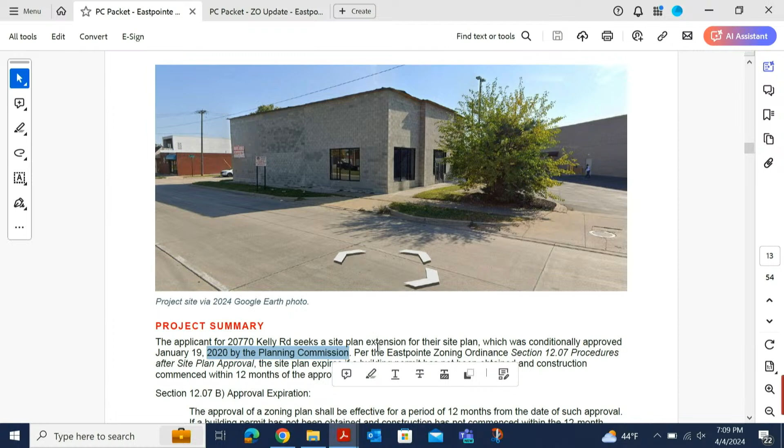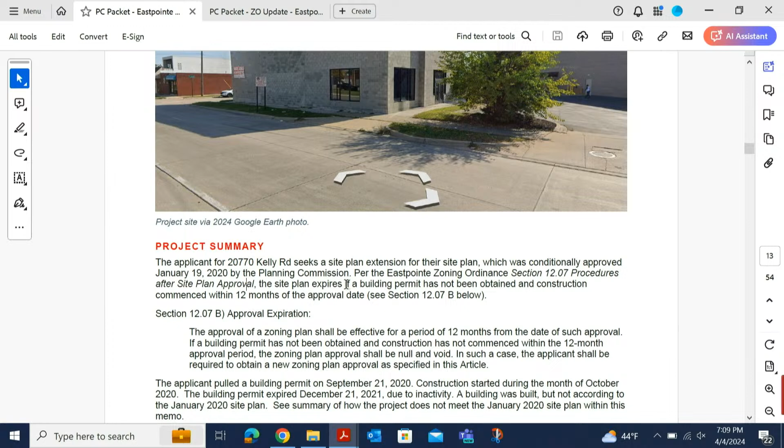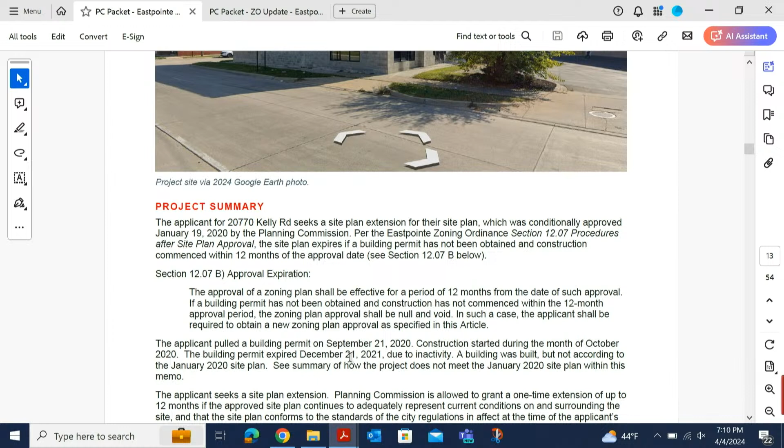Per the Eastpointe zoning ordinance section 12.07, procedures after site plan approval, the site plan expires if a building permit has not been obtained and construction commenced within 12 months of the approval date. This is the technical language cut and paste from the zoning ordinance. The applicant pulled a building permit in September 2020. So their site plan was approved January 2020. They pulled a building permit September 2020. Construction started during the month of October. The building permit expired in December 2021 due to inactivity, and a building was built, but not according to the site plan that was shown to Planning Commission in January 2020.

And the summary of how that site plan or the project does not meet the January 2022 or 2020 site plan is within this memo, and I can just go over that in a second.

So the applicant today seeks a site plan extension, and Planning Commission is allowed to grant a one-time extension of up to 12 months if the approved site plan continues to adequately represent conditions on and surrounding the site, and if the site plan conforms to the standards of city regulations in effect at the time of the applicant's request for an extension. So this is copied and pasted from the language of the zoning ordinance.

As we know, the applicant submitted a request for extension in February 2024. The January 2020 site plan is no longer in compliance with the 2023 zoning ordinance update. I can show you a summary of how the project does not meet the 2023 zoning ordinance, if you wish as well. Both are presented within the memo.

So before we go into your recommendation, I'd like to ask, so this site plan was done for a completely different individual? When did you buy this building, sir? I just purchased the building, I believe we closed at the end of the year. My apologies, I believe we closed at the end of 2023, the fourth quarter of 2023 of last year, and this is the previous owner's site plan.

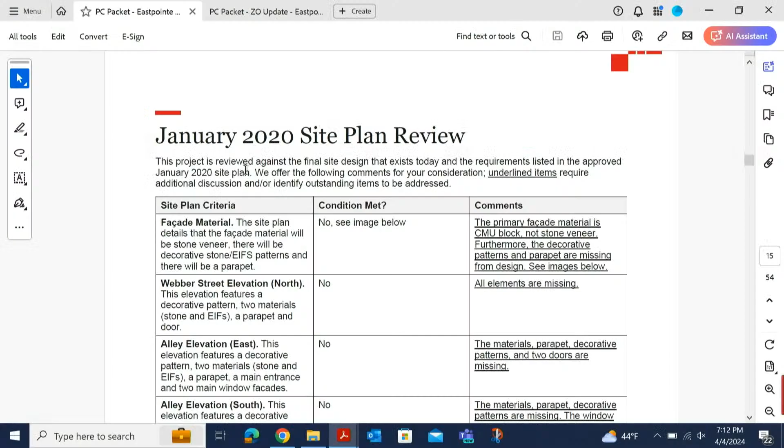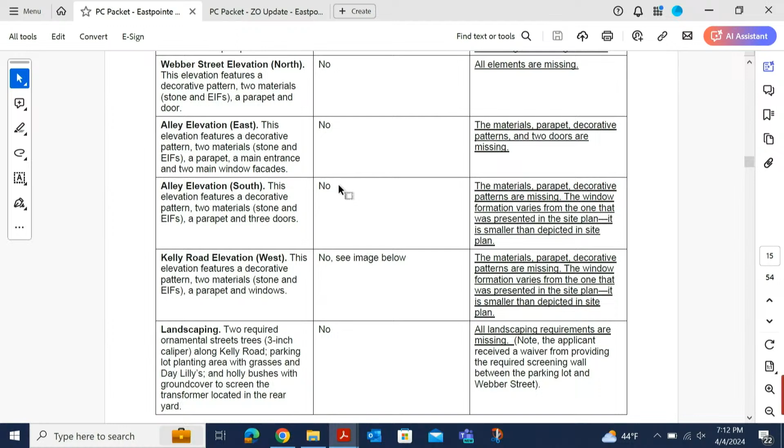All right, I'm sorry to interrupt, Ms. Brochowski, go ahead. Okay, well I'm just showing you, I can get into the recommendation if you wish, but this is the site plan review and how it does not meet the site plan. This is the review of how the project today does not meet the requirements from the 2020 site plan, and I have a summary of it, but you can just see this picture here.

So the facade material is different, there's no parapet on the roof, the windows are a little different. This is just one facade.

All right, so that's not an accurate image because currently there's scaffolding behind the building. Well, on that side, correct, there is. It looks like there is some sort of material. There is, correct.

I don't know, unfortunately, there's not the front, but if you look at the front of the building, because we had a mix-up when they hired the guy, usually in all my building situations the builder pulls the permit, starts the work, sends me the bill, and gets working. But on his, which I look back, because he told me that he put on the paperwork not pulling the building permit, but of course I kind of overlooked that, so that's on me. So we started it, and the front of the building does not look the way it looks now. We actually put a nice frontage on there, it looks good, and then the city stopped us from doing the work, so we haven't done anything else since then.

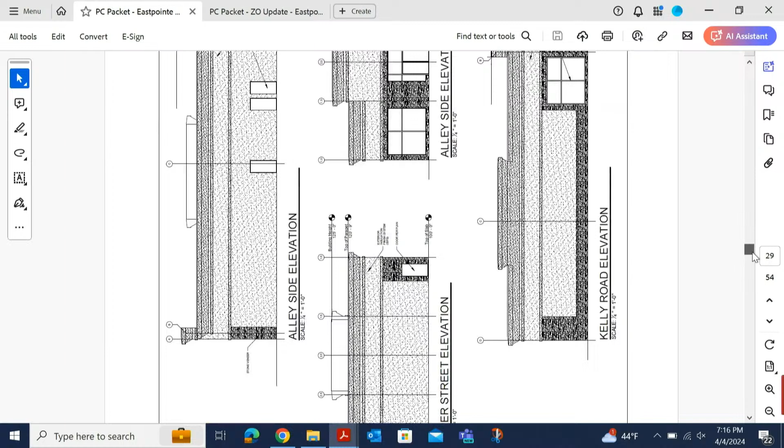If we look at the site plan, if you guys want to take a tour, we can see some instances of implementation—like the alley side elevation drawing is similar in concept—but the facade materials are different and the roof is different.

So would it be safe to say he had an approved site plan and then went and did whatever he wanted?

I think, wasn't the whole thing suspended because didn't he try and go for a marijuana license? Chair, I don't have this information. I can only talk about the facts that I have today.

I was under the impression that building was up for consideration for a medical marijuana dispensary. Mr. Albright, was that the original owner? Mr. Chair, I'm not sure if this particular site was one of the proposed locations. I know there's one across the street on the corner that was awarded, but I'm not familiar with this particular site.

So with the site plan, according to my guys, he was following it, he just didn't complete it. He had to build the building, get everything put together and up, but he didn't finish the cosmetic work—adding the elevation and so on—which can be added onto the building.

I sent a picture so you'll be able to see it, but I think what I've put there so far is going to be a really phenomenal looking building in the city of Eastpointe. I've driven around, looked at a lot of buildings, and I think this one does enhance the city and the building itself.

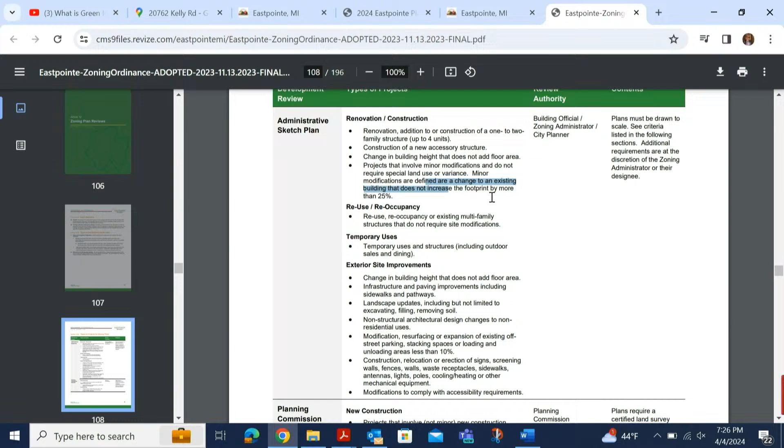Minor modifications are defined as a change to an existing building that is not an increase in the footprint. So we're not increasing the footprint. Exterior site improvements - change in building height, infrastructure, paving, landscapes, non-residential architectural design or non-structural architectural design, changes to non-residential uses. That would be us.

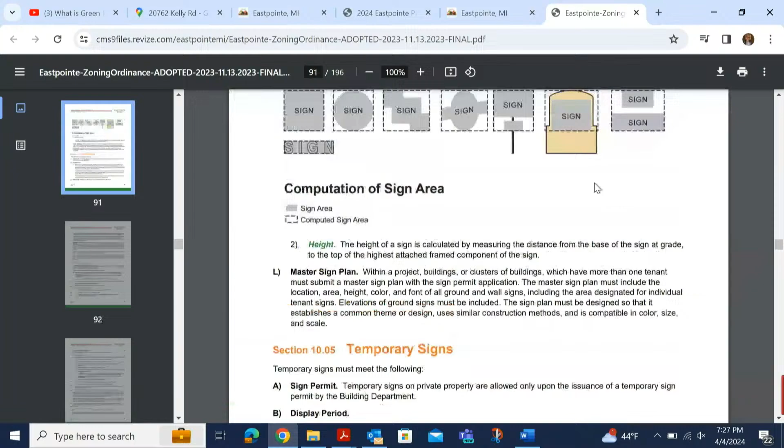But I do want to point out, so we could go to administrative review if the city attorney agrees, but I do want to point out that this design does not meet the form-based code standards that we have in place. What type of code is that? The form-based code standards that we have in place for the Kelly Road corridor.

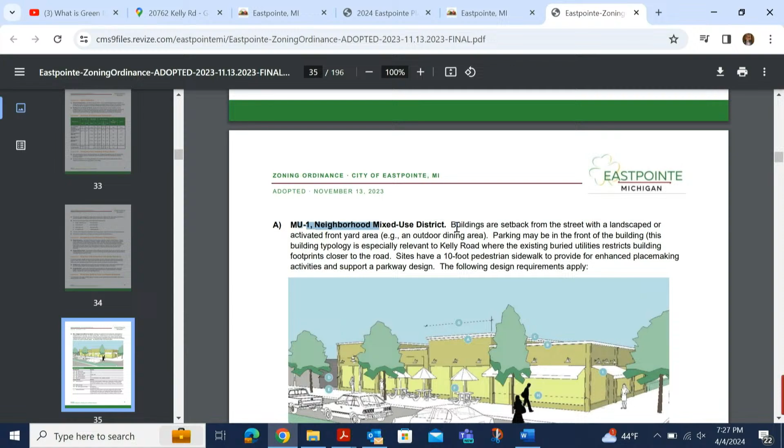So go to our zoning ordinance, schedule regulations, building form and design standards, then go to mixed use, neighborhood mixed use district, and we see that we need a minimum facade height of 16 feet. I don't know what your facade height is, but I don't think it's 16 feet.

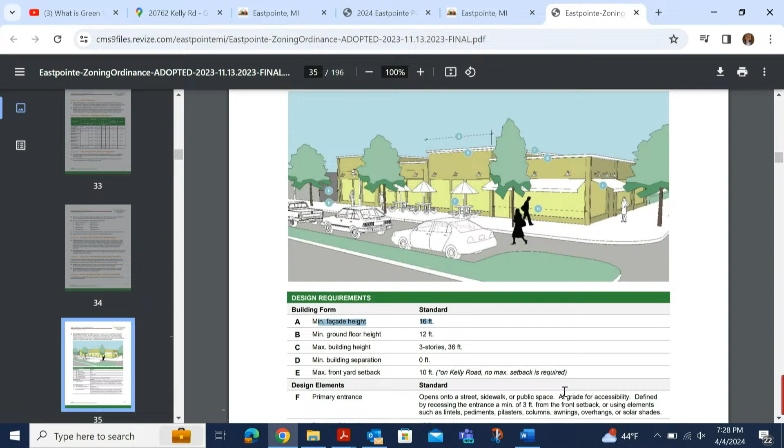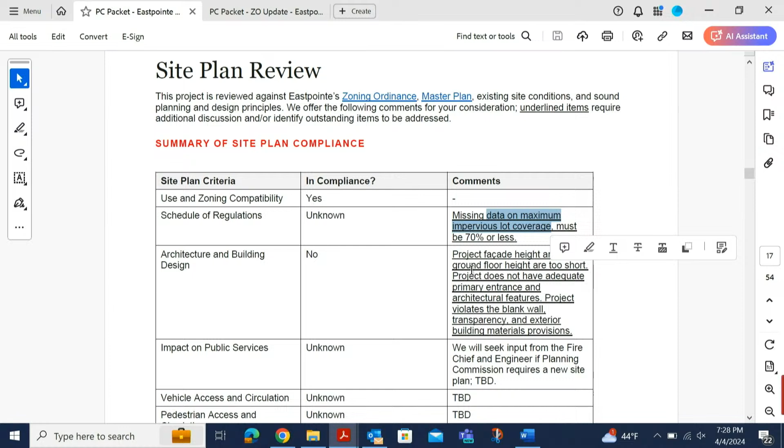Let me look, I have it in my... okay, so this is the compatibility of the project against the current standards. Schedule regulations, we need maximum impervious lot coverage. That's easy for the architect just to find, it's in CAD - understand what the lot coverage is of the site.

Then architecture and building design - the project facade height and ground floor height are too short. The project does not have adequate primary entrance or architectural features, as you saw the blank wall along Kelly. The project violates the blank wall transparency and exterior building materials provisions. The building materials proposed on site, currently, are CMU block, and that is not allowed. It is only allowed as an accent material in the light industrial district.

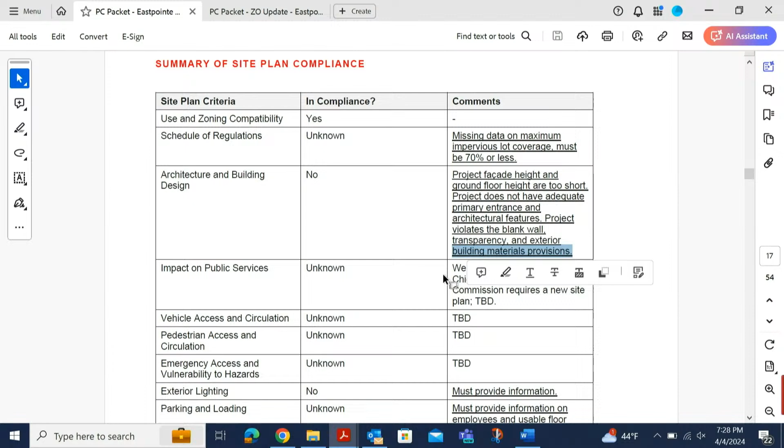But this gentleman, prior to the city stopping him, was putting a new facade over the brick. Right, I was trying to - excuse me for speaking, I didn't know if you were done, my apologies. I was just trying to get the building finished, and everything that's in there is because nobody's done the work. So I'm trying to do the work so we can put the facade on the building, get the block out, put the aesthetics back on the building so it looks great.

And the whole building will look exactly the same as the front of the building all the way around. I also believe there may be some lighting on each side of the building as well. As far as the height of the building, I think having the one section higher than the rest kind of gives it a dated look compared to what's going on in the new construction of buildings that are up and coming.

Mr. Albright? Thank you, Mr. Chair. Mara, what would the applicant need to do as far as changes to the existing site plan to adequately represent current conditions on and surrounding the site, and also to conform with the standards of city regulations currently in effect?

What would he need to do? Thank you, City Attorney, Chair.

Everything listed on this memo is what I was explaining. This memo is an analysis of how the project today does not meet zoning ordinance standards. So everything on this memo is what the applicant needs to provide in their site plan in order for the project to qualify with the zoning ordinance regulations.

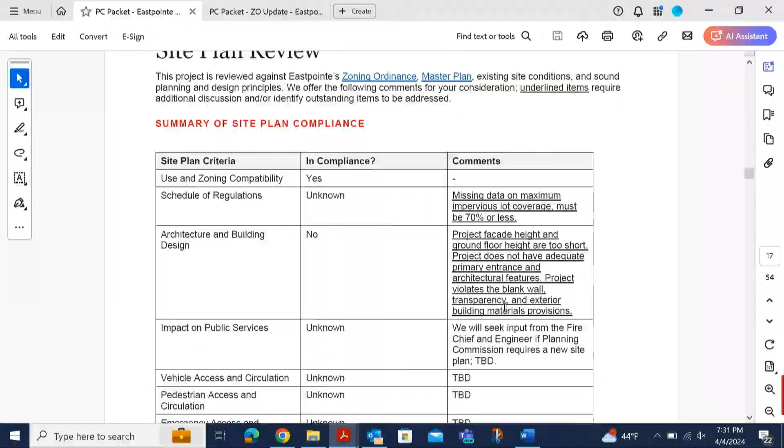In the interior, we're also going to take time and redo the flooring in there, polish it. It's going to look really nice, and it's going to be good because I'm sitting next to a Foot Locker, and my business actually meshes really well with the Foot Locker customers. So having both of us there is going to be a nice little area where people are coming and going. My business also kind of correlates with like the Jimmy Jazz that's there, the Snipes, so all of us will be just kind of feeding off each other, and I think for the building that we're going to put there, it's going to look like it belongs in the vicinity with all the corporate stores as well too.

Chair, again, is this something that can be done administratively with him presenting this list of things, or do we need a full site plan with council? I think that's the question, that we all agree there's some changes need to be made. It's just, can it be done administratively? Sure.

Okay, so I hear you. We appreciate you coming in and doing business in Eastpointe and improving the building, 100%. I am just portraying the existing conditions, but we know that you're changing the existing conditions. So thank you, I think we can move past that point.

And what we're asking today is for us to see a vision or illustration of your vision. So a site plan illustration of your vision. And we need to know that that complies with the existing ordinance, because the 2020 ordinance is outdated, and it's too late to ask for an extension because the 2020 ordinance no longer follows current policy.

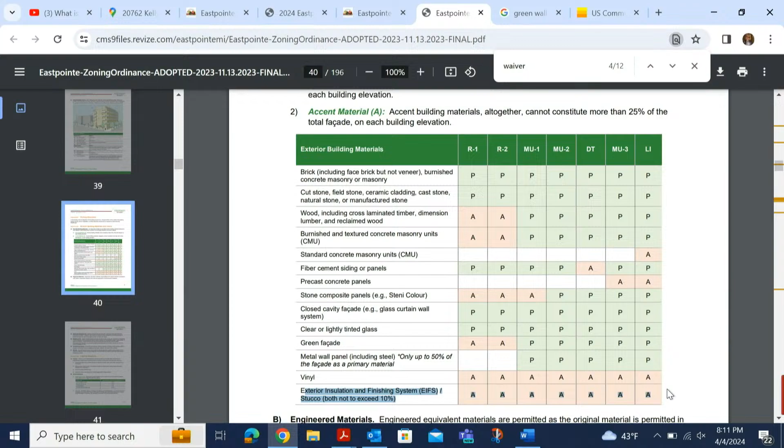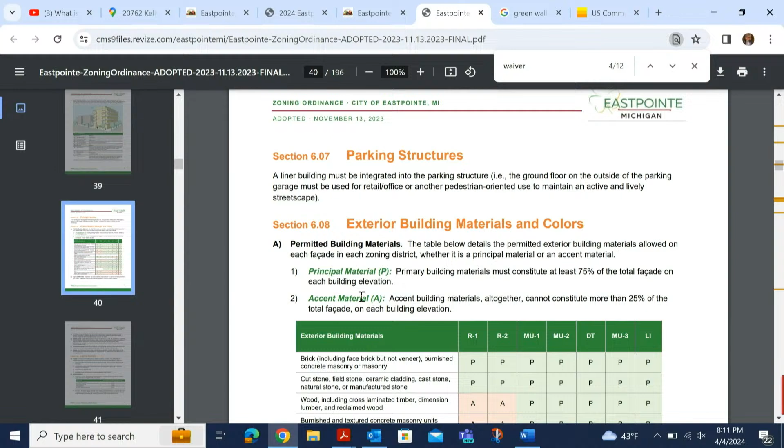Chair: exterior insulation and finishing systems, EIFS, and stucco are not allowed as a primary building material. They're only allowed as an accent material, and both cannot exceed up to 10% of each facade. On page 31, section 608, we have a list of all the allowed materials. You're in the mixed use one, so you can use all of these marked with a P.

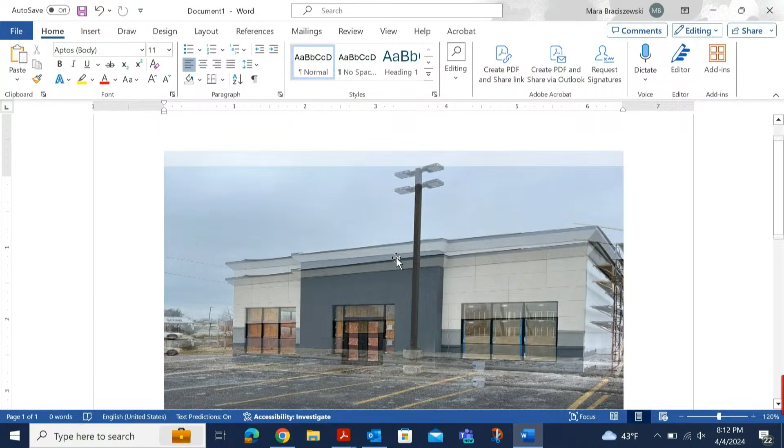Are you saying that this material right now is... It is kind of like a stucco EIFS, but there's a method to how they change the look of it, so it looks like limestone. So that would be my question.

Because I've already put all the money into the front of it, would I maybe technically be allowed to use my 10% on one side, all on one side, and then do the other 3 sides with something else? I would ask if I could use the 10% on each side all on one side, and then go around and use the materials required for the other 3 sides.

So it seems like you're using a manufactured stone. But anyway, in any regard, the Planning Commission has the opportunity to waive materials. So just come in, present the material, maybe bring in a sample.

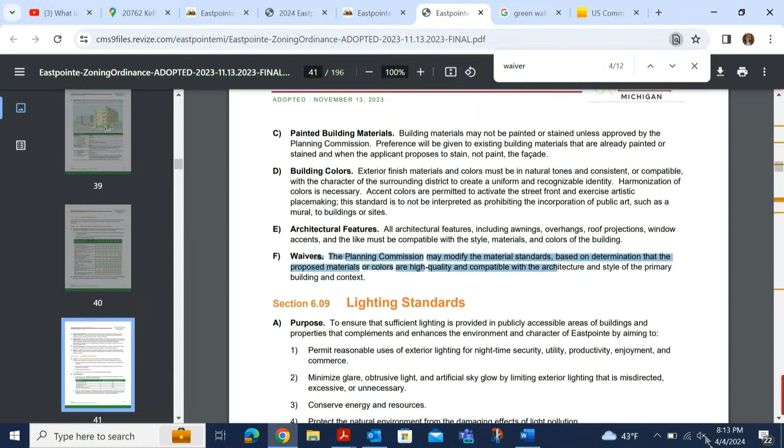People have done that in the past, and they can deliberate. Okay, cool, yeah, I'll bring it in then. And when does this gentleman need to have his site plan to move this along? You said the 15th? The deadline was Tuesday, but we can give you the 15th.

15th, okay. And then if I bring it by the 15th, I come back here the first Thursday in May, is that when I come back? Correct. And now, once I bring the site plan, or we get it submitted and we bring it back and meet here on that day, I'll probably bring the materials with me that day. And then will that day give us the ability to look at what's happening, and then say I can either move forward, or is there anything else that's at question at that time? I would recommend that your architect, whoever's putting it together, work very closely with the city administration. That way, Thursday night, the 2nd, when you come in, things are rather seamless, and there's less to deliberate and fight over.

Okay, yeah, no problem. So I would work as closely with them as possible. And if something's put forward that is not appropriate, they're going to tell you. So I can bring the materials here to show them, and I don't have to wait to bring them to show you guys? Correct. Okay, perfect. So I can bring those in anytime before I even submit. You'll probably want to do both. Okay, so I'll have them with me, them first, then for you guys on May 2nd. Or May, yes. Okay, they're your gatekeepers.

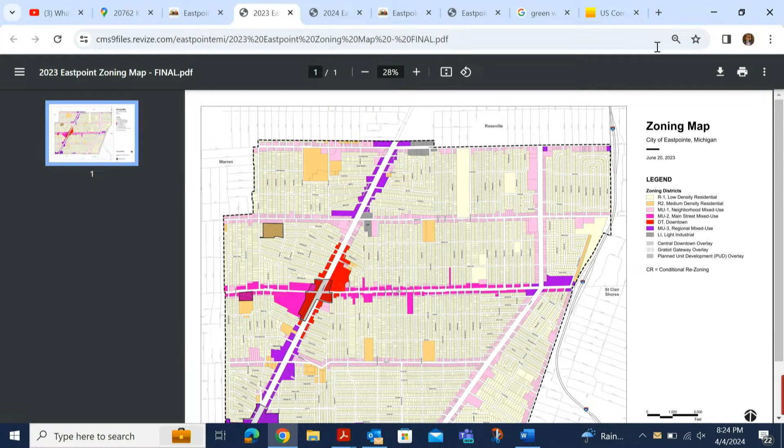R2 is the orange parcels. These are where existing schools are located, and we are looking to allow childcare centers at these parcels by right. I'll keep going and then we can ask questions as needed or reserve them.

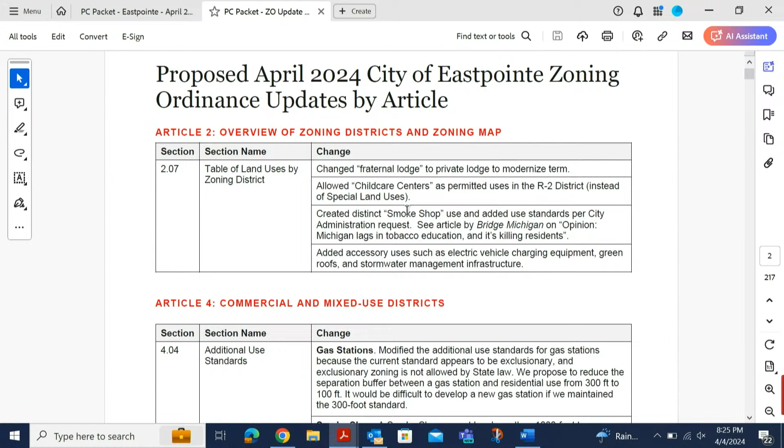Additionally, we want to add smoke shops back on. I know the planning commission talked about this, but we as an administration understand the challenges that open use of tobacco is having on our residents, especially targeted at youth and high schoolers. We would like to add more standards and discretion as we allow smoke shops to open. The police chief would also like to see this as a use with additional use standards. In your packet, I also included an article on how Michigan lags in tobacco education and how it's killing residents. These are all items the city administration wanted to share.

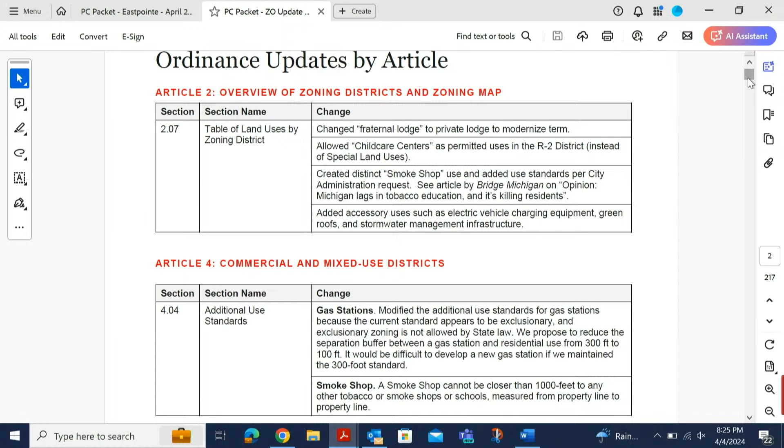If we're going to put the smoke shop back in play, maybe the definition should include vape and things like that, because that seems to be a much more prevalent issue than anything else. Yes, we can look at the definition. Do you want me to wait till we get to the glossary, or look now? Let's look now. Okay.

I just remember that being a bone of contention at one point. The definition reads: a retail establishment with the primary purpose of selling tobacco or tobacco-less vapor products with nicotine, which includes but is not limited to electronic cigarettes, e-cigars, e-cigarillos, e-pipes, e-hookahs, or electronic nicotine delivery systems that allow the user to simulate cigarette smoking and ingest nicotine. So it's only essentially targeted towards nicotine.

Isn't marijuana a vapable substance now? Does that need to be discussed? Does that need to be part of it? Marijuana is not allowed. I'm just saying there are some, I've been informed sadly, because a lot of my friends seem to be enjoying this a little too much, that it can be in vapor form. So you're saying it would not need to be mentioned in this? No, it doesn't. We can add that provision if you want, but this only refers to cigarette smoking and ingesting nicotine, not marijuana. That's what a smoke shop is allowed to do.

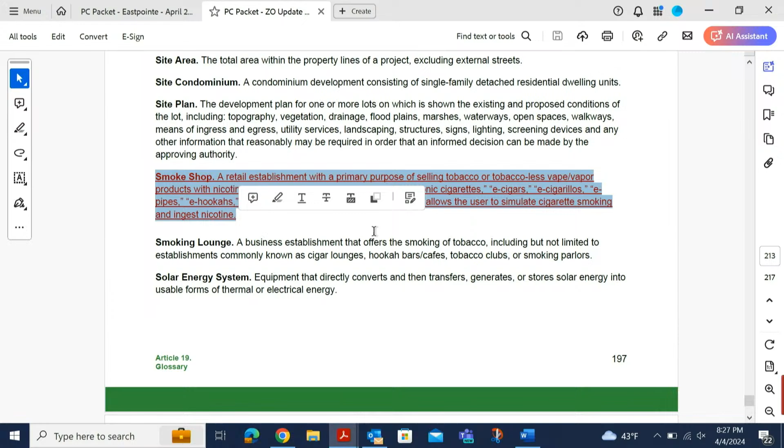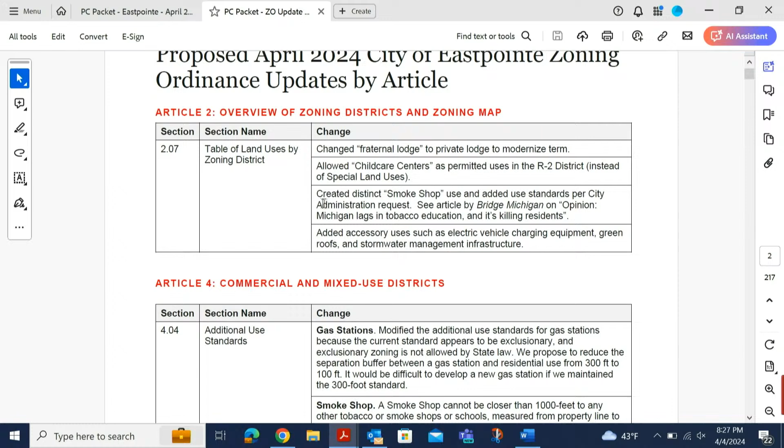Okay, so back to Article 2. Moving on to Article 4. This is where we address exclusionary zoning, which is not allowed by state law. Currently we have a gas station provision that doesn't allow gas stations within 300 feet of a residential use. Since no properties in Eastpointe would ever allow a gas station within 300 feet, because they're all closer than that to residential uses, we need to modify this and add 100 feet as the buffer to meet state law.

And then we add in standards for smoke shops. A smoke shop cannot be closer than 1,000 feet to any other tobacco or smoke shop or school, measured property line to property line. Could we include child care facilities within that? Yes, of course. Okay, I've got to ask, how does smoke shop regulation affect drugstores, party stores, gas stations, which all seem to carry tobacco products?

Smoke shops are for the sole purpose of selling nicotine products. All of the others have multiple purposes, so they would be essentially exempt, and perhaps regulated by the state, just like the grocery store or anything else.

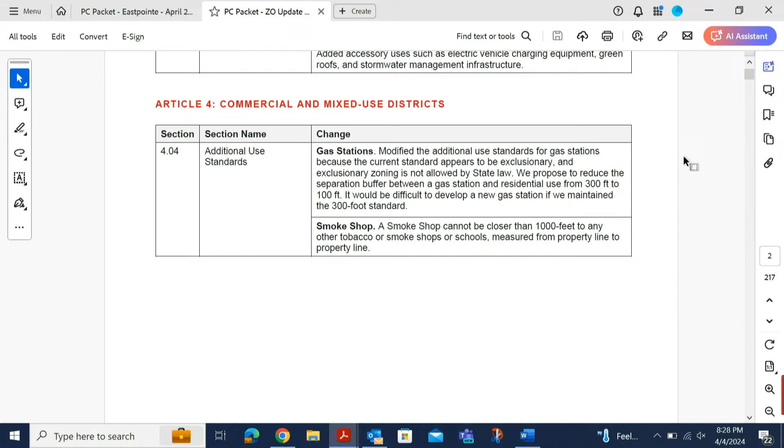Okay, Article 6. We have a modification in the side yard setback. I've talked with our building official—he's a great guy, by the way—and he says we need a 5-foot side yard setback instead of the 4-foot we have, to meet Michigan Building Code. So we're always happy to see a builder comply, and we're going to change that.

We're also going to allow rain barrels, if you guys allow this. The proposed option is to allow rain barrels in the side yard setback.

Additionally, I wanted to talk with you today about how we determine—let's go here, let me pull this up, bear with me—how we determine blank walls and transparency.

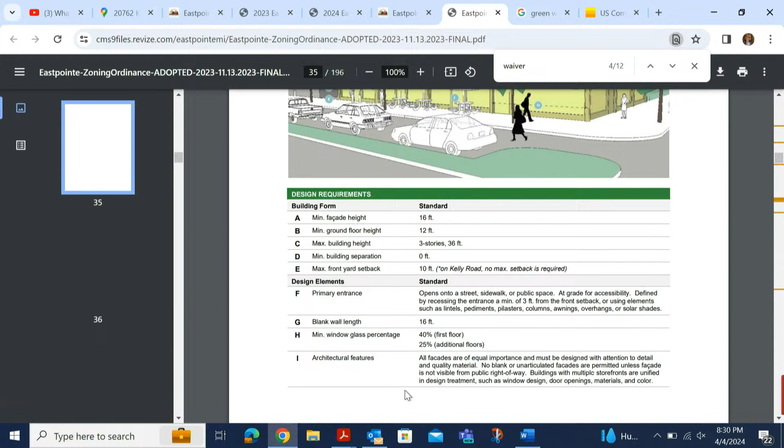We don't assign a facade, so this is open to interpretation that all facades could or must comply with the blank wall provisions, which I do recommend, and all facades must comply with the transparency recommendations or requirements, which maybe we don't want. So perhaps all walls must meet the blank wall provision, but maybe just the primary walls must meet the transparency provisions? Or do we want transparency provisions all around as we engage in new construction within the city?

So we need to determine what a primary wall is. Is that the front door? Yes.

You wouldn't want windows in the back of a building because typically businesses have deliveries made there, and you definitely don't need windows back there because it could be a smash and grab opportunity. The old merchant in me likes air, brightness, and windows, but I'm also not willing to cripple somebody's business because I happen to like windows. Some people might not like windows. But I think the outside of a building needs to be aesthetically pleasing, whether it's visual cues with light boxes and imagery inside, not rope lighting, or green walls, or appropriate murals. But I don't see any need for windows in the back of a building.

And I think, to Ms. Naylor's point earlier, if the front of the building is right, you're good. I think this gentleman's building was a one-off, frankly. It's just sad that it's so difficult to meander our way through it.

Chair? So I'm hearing, and I also see this provision in here, that perhaps the interpretation of this ordinance should be that the facade transparency requirement is for facades that abut a public right-of-way—so right here and right here, but not the back of the building where there's parking. That would have included the Kelly Road side of the gentleman's building that was here earlier, since Kelly Road is a public right-of-way.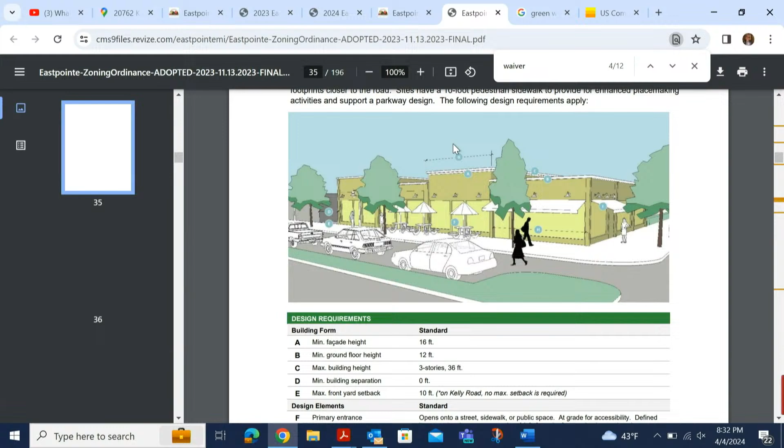Chair, was that a question? It's more of a comment. I didn't hear it. When you say abutting a public right-of-way, that leads to the Kelly Road side—yes, that abuts a public right-of-way, Kelly Road. So the provision would be included if this was newly built, along this sidewalk and along this sidewalk, but not the parking lot—though technically the Weber side of that is the back of the building. And then again, we get into the situation I mentioned earlier with the CVS on 9 Mile Road, where along 9 Mile, a public right-of-way, we have a bunch of false windows.

I just think this building is in an awkward spot, and he's got 2 right-of-ways, essentially. Well, 3 if you count Weber.

True, okay, sure. We don't need to go back to this conversation, but moving forward, are you comfortable with this interpretation of the ordinance? I'll put in some clarifying language: all building facades that are newly built must meet blank wall provisions, and all facades that abut a public right-of-way must meet transparency requirements.

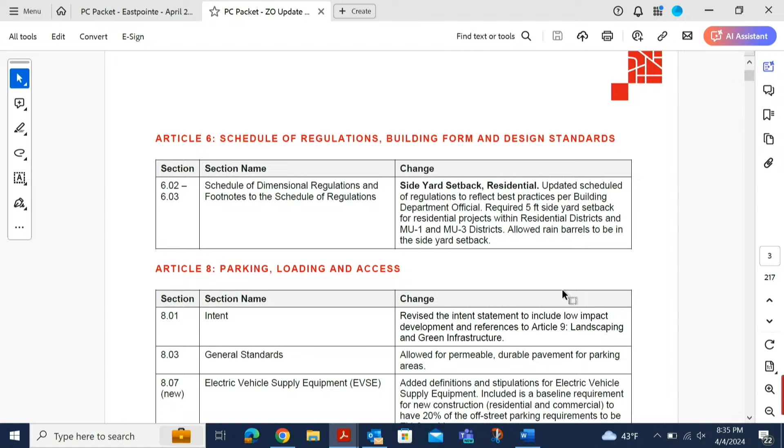Is that really what we want to be telling people? Is Weber's the side street behind it? So you're saying it has to face every street? You want windows facing... any building, any side of the building that's facing the street? I think it's overreach to tell somebody they have to put windows all the way around. And technically, if you look at that building, does what we're calling the front actually abut the right-of-way of 8 Mile? Because the Foot Locker is there, I think that answer would be no.

I mean, buildings in general, we have to look past that building, even though... No, but it is a perfect example to ask this question. You're right, based on the definition we're discussing.

I just don't think it's our right to tell somebody they have to put all these windows in. I think it needs to be handled administratively, or on a case-by-case basis. If you have a beautiful parkway, of course you're going to want windows to take advantage of the flora and fauna, but if you're abutting an auto mechanic shop, you have to think of the nature of the business. We can't just go straight across the board, because some buildings don't need windows for their operations. I understand the facade, the door entrance, and transparency, but some businesses don't want all those walls open with windows.

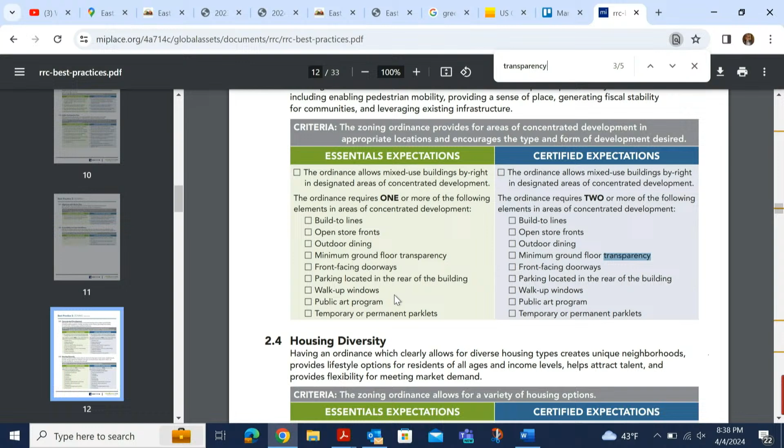We got you a lot of points elsewhere. Even if we say on the front, the primary entrance wall, do we have to designate that it has to be side walls, every wall? I would just say primary entrance walls.

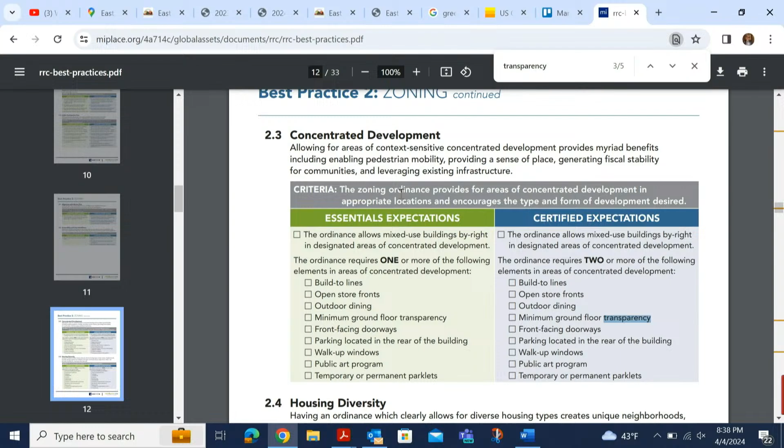From my experience working with the MEDC RRC community program, they're looking for transparency along all public facades along public right-of-ways. But I think they would be comfortable with the planning commission having the right to waive it, because not all businesses might need windows, or for safety provisions might not be able to have windows. I would think offering flexibility within this option would make it far more appealing as a redevelopment-ready option.

I like the way they live in a vacuum. Here's the answer and it fits all situations. And when you're sitting up here, you find out that pie in the sky doesn't always work.

Like I said, I was just using that building from earlier as an example of how I'm interpreting what this says, which was that all three of those sides would have had to have windows. And actually, one side is actually the back of the building, for all intents and purposes.

We had a great debate here over just the windows on the Kelly Road side. Imagine what would have happened if we'd had to consider the Weber side too.

Chair, please. So I see right now we have 40% on the first floor, and 25% on additional floors? I think the other thing we want to consider is there are a variety of different kinds of windows, right? Not everything has to be a display window. For a retail store, you can have the little windows up above that let light in, but someone from the street, walking or driving by, can't necessarily see in.

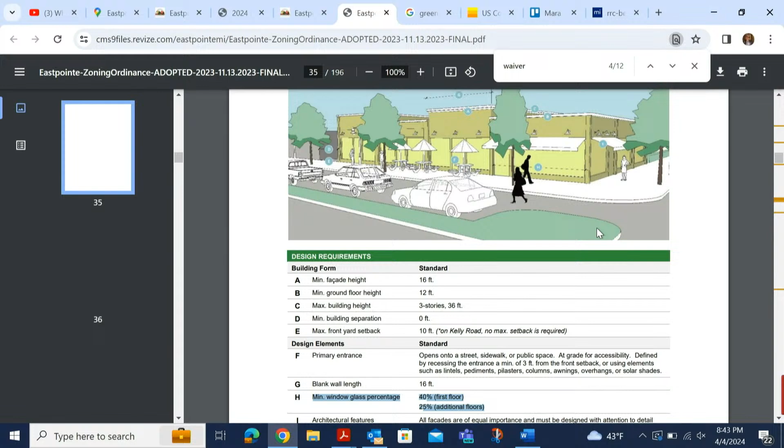Can you include some language that allows this to be waived by the planning commission? I mean, I don't mind if it's in there as long as we have the ability to use some discretion.

Because I don't—and I could be wrong—but I don't think anybody here would want to insist on putting windows on the Weber side of the building we discussed earlier, which would be a distinct possibility based on how we word this ordinance.

What about a provision, Chair, that included the language we wanted for using murals and green walls as opposed to flat out 40% or 25%? Absolutely.

Aren't those two different issues? Sure. So I'm hearing that the primary facade must meet the transparency requirements, but additional facades that abut the public right-of-way can meet the transparency requirements or use other architectural variation, like green walls or murals, to meet the interesting architectural feature component of 40%.

I would still also include a waiver in there, at the discretion of planning commission and zoning administration. Okay, heard. Good policy. Are we comfortable moving to Article 8?

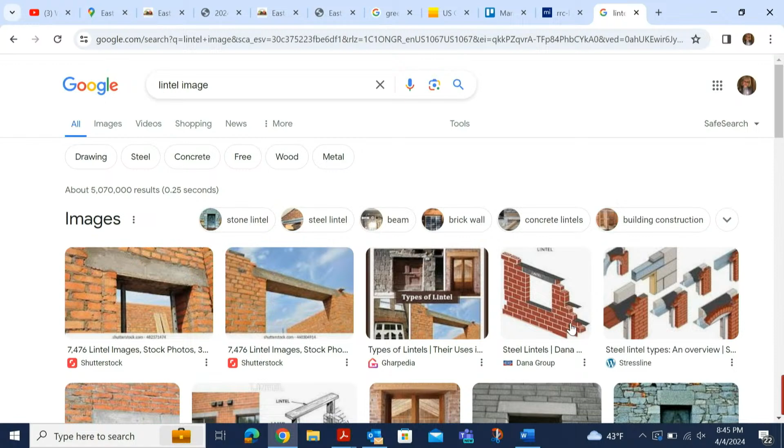So let's just go to one of these pilaster images. Okay, something like that, a lintel image—this is something above a primary entrance, more so for primary entrances. Let's go to soldier course brick.

Soldier course brick—that's the differentiation in brick along a facade that you see, the details, like these little bricks here. Maybe we can find a better image. Did you say an awning was an option too? Yep, awnings, windows, color paint, materials.

Okay, so they have a lot of options for a blank wall without having to have windows, if they choose. Yes, they do.

And I get it as a business, but I'm thinking of it as a house—do I want my house to not have windows on one side? I get they're two different animals, but in a house you've got to have them to make sure somebody can get out in case of a fire. It's required, I get that.

I love lights, natural light. But yes, I don't want to force someone to put in something that isn't conducive to their business.

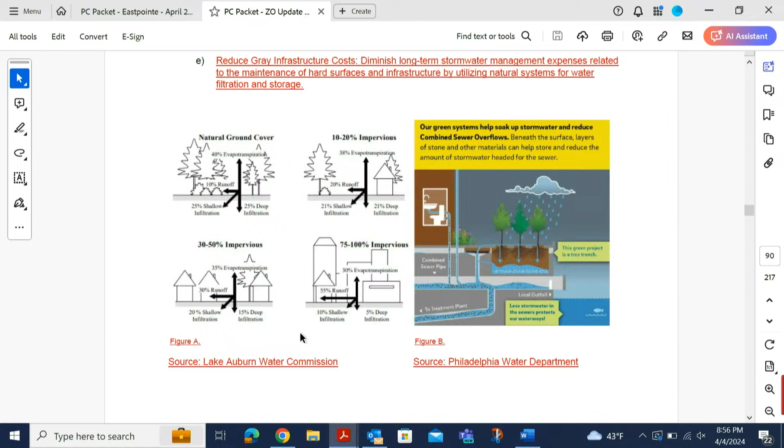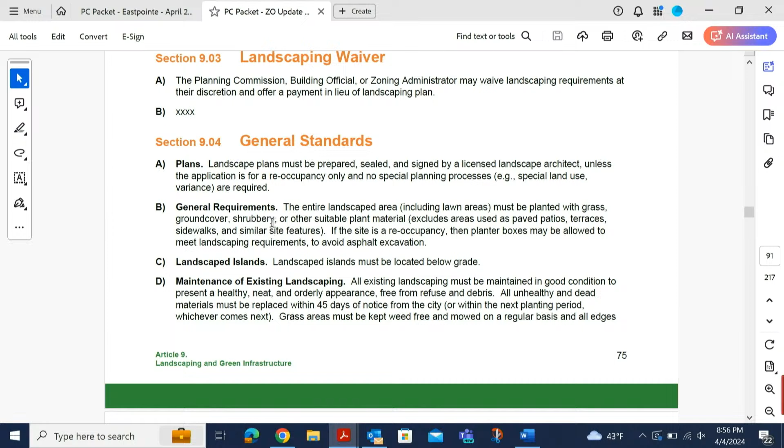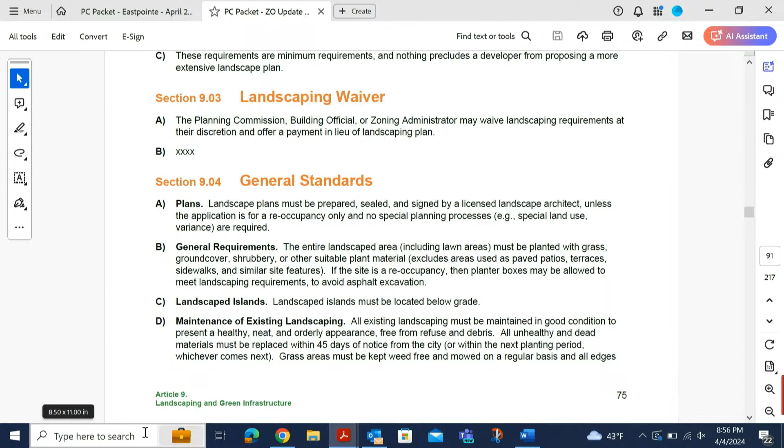Here on page 4, section 9.04, I'm seeing a description of a bioswale. I don't know how many people remember Eastpointe's first and only short-lived attempt at a bioswale. It turned out to be nothing more than a rock and weed-filled drainage ditch that collected debris behind our municipal library. It was not pretty—it was ugly from the get-go. They called it a bioswale, but it was a weed-filled ditch that collected debris. So that has always concerned me.

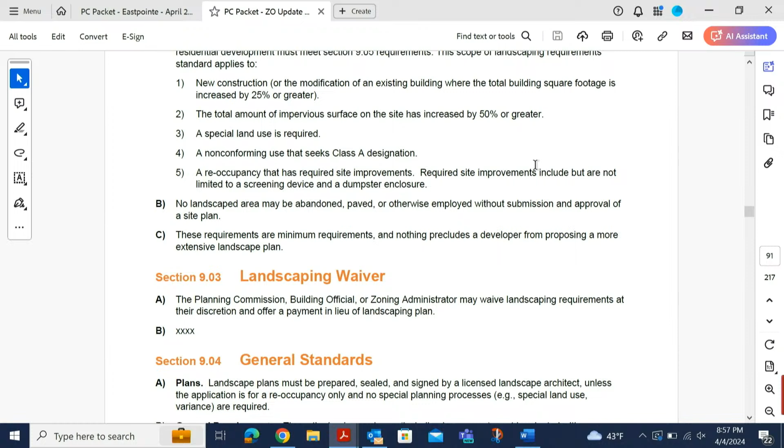I think we've come a long way since then, and I'm sure Mr. Kraus and Ms. Hogan, if she were here, would tell you that we're being very intentional about all the species we're planning to make sure it looks nice. It doesn't just look like you're out in the country—it's still designed to look natural, but it's not going to be like the bioswale you described behind the library. Forgive me, I think I misspoke—I believe it was actually filled with, as they referred to it, native plants.

Weeds. But yes, that's what it appeared to be. So in some of this language, I think we need to also have some enforceability—that if somebody is putting a bioswale in and it's doing nothing but collecting candy wrappers, plastic cups, or styrofoam cups—serious litter and debris—there needs to be some sort of mechanism that holds people responsible for the maintenance and aesthetic presentation of their bioswale or anything of that nature.

Yeah, I definitely agree with that. As we were getting into that discussion regarding a green wall, having a thorough and intentional maintenance plan as it pertains to any form of green infrastructure is essential to the implementation of this type of infrastructure. So I'm definitely in agreement with that.

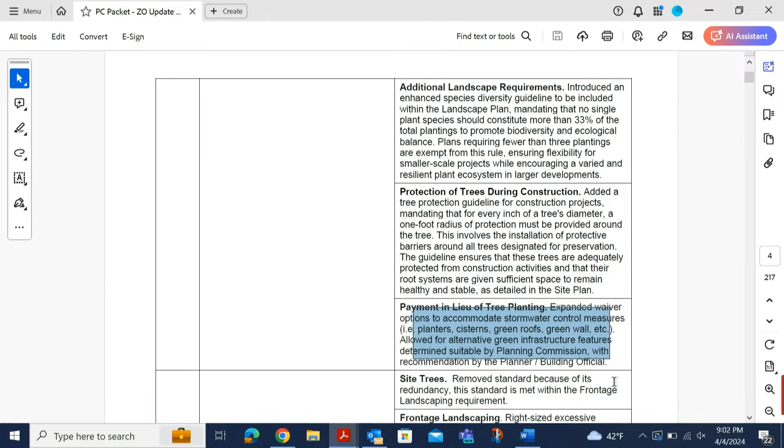Parking lot landscaping builds off what we talked about in the previous article—having alternative green infrastructure features like permeable pavers, rain gardens, and bioswales as a substitute to the number of trees, with no less than one tree and 150 square feet of landscaped area for every 20 parking spaces. It says 10 here, and I think that's up for discussion, because parking lots accommodating 20 vehicles isn't consistent throughout the city, so we should be empathetic to smaller development projects with maybe 10 parking spaces where 150 square feet may not be realistic.

So I would welcome some discussion on how we feel it would be best suited to approach that moving forward. That's it for me.

Anybody have anything for Mr. Kraus? I'm sensing no. Moving on. Okay, thank you.

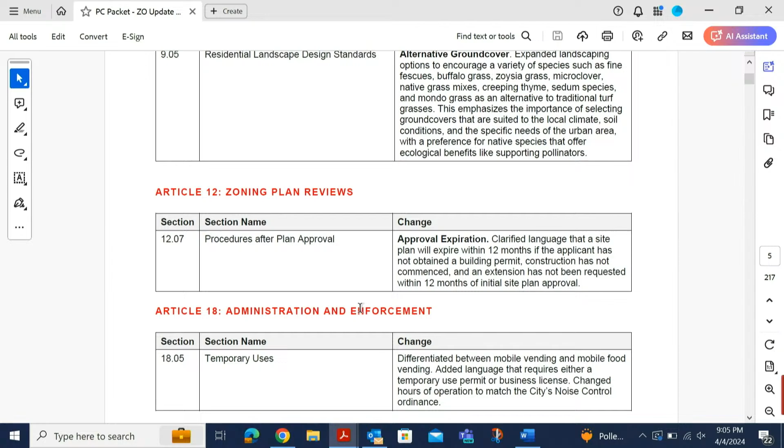Let me ask you a question. What is the city mechanism? If I get a site plan and haven't done anything with it, does anybody from the city contact me and say, hey, you're 3 months into your site plan, where are you at? Is there a mechanism like that, or is it on the 11th month, the last day before I'm expiring, that somebody calls and says, how's the building going?

Chair, your planning department also serves as community and economic development developers, so we support businesses as much as we can. That being said, we give warnings—a 3-month warning, a 6-month warning, and a month-before warning.

Instead of using the word warning, how about you just say, you're 3 months in, what can we do, how's it going, as opposed to being an ominous threat looming above? Sure, so colloquially I use warning within this, but my demeanor at the counter and when speaking with businesses or proposed businesses is always friendly and warm. I let them know in a positive way that their site plan will expire within whatever amount of months, and invite them to come visit us—love to see you.

I do not know, she's Miss Sunshine. Little Miss Sunshine.

All right, on that, we are on Article 18. We're going to see more conversation about this. I alluded to the Article 18 changes in the March meeting, and we'll see more when staff dives in to clean up the city's general code of ordinances as regulations pertain to businesses. Right now we did a simple cleanup, and we've differentiated between mobile vending and mobile food vending, because mobile vending could contain uses that are not just food, and we've added language that either a temporary use permit or a business license is required.

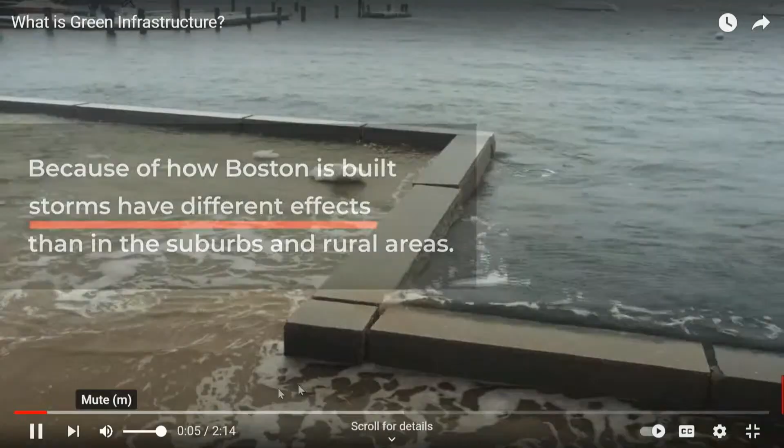Cities have lots of hard surfaces, like roads, roofs, driveways, and sidewalks. When rain falls on hard surfaces, it can't absorb into the ground, so it travels across the surface. This is called stormwater. As stormwater moves across hard surfaces, it picks up pollutants and litter. Catch basins in our roadways capture stormwater and carry it through a network of underground pipes called storm drains. Storm drains then release stormwater and pollutants into our streams, rivers, and the harbor.

This damages our ecosystem and prevents recreational use. To help solve this problem, the City of Boston is building green infrastructure, which works to mimic the natural water cycle. Plants, soil, and other natural materials absorb water and remove pollutants before stormwater reaches our water bodies. Green infrastructure has many other benefits—it creates new green space, cools our neighborhoods, improves air quality, and reduces flooding.

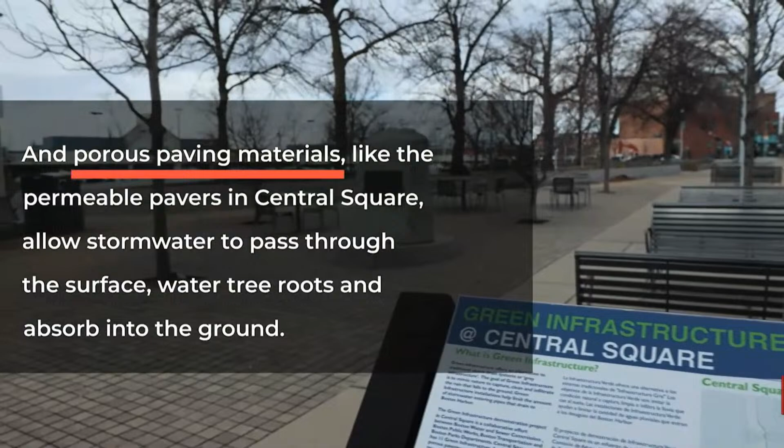Green infrastructure comes in many shapes and sizes. Rain barrels capture stormwater from the downspouts on our homes. Green roofs, like Fenway Farms, transform asphalt roofs and catch water for garden beds that grow food. Bioswales in parking lots, like at the Sumner Upper School, slow down and clean stormwater. Plants and trees provide shade, cool asphalt, and prevent puddling. And porous paving materials, like the permeable pavers in Central Square, allow stormwater to pass through the surface, water tree roots, and absorb into the ground.

For more information, visit boston.gov/green-infrastructure.

It was interesting, I was in Pittsburgh last week, and there was a section of route 376 they call the bathtub, because it chronically floods, going back to 1975. I found it sad and ironic that they literally call it a bathtub—and these are meteorologists and road people on the news saying it. It's like, you'd think if it's a bathtub, you'd fix the problem.

Well, it isn't a problem with the road, it's that they put a road in a floodplain. The majority of the time when it's dry, you have a nice usable park, and when it needs to do what it's supposed to do, it does. And it floods, becoming a permanent puddle when it rains.

Anything else? Yeah, so you also had an article associated with this video. The article introduces a new topic we haven't really discussed before, gray infrastructure, which is different from green infrastructure. Gray infrastructure is the traditional storm gutter systems that you see.